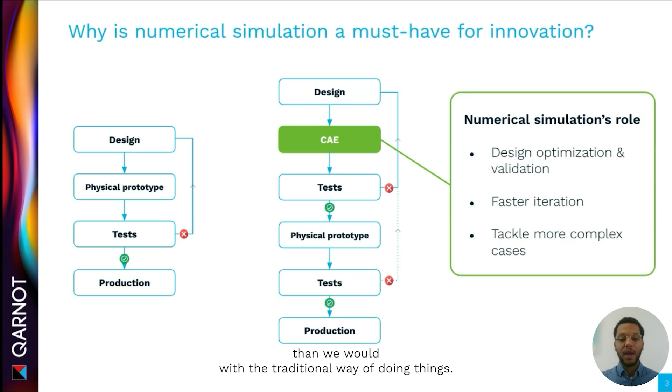But even though this allows for building products faster, there are some blockers that remain to truly be able to use numerical simulation to one's advantage. And the first one is infrastructure management, because to be able to perform numerical simulation, you would have to manage all of the layers that it takes to perform those simulations, which also means a lot of upfront costs, because to operate your own resources, you have to be on the CapEx side of expenditure.

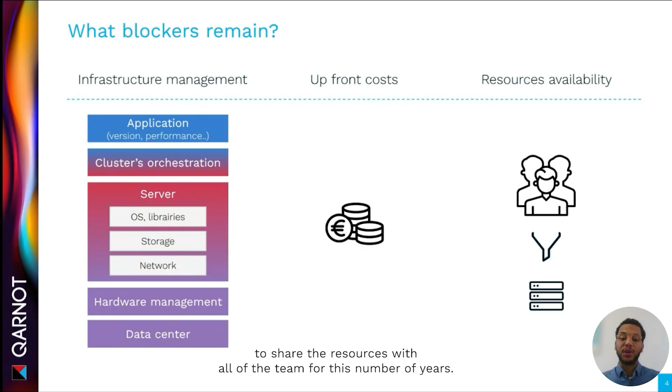And then once you come all this way, you have to be able to make the resources available for your engineering team, which can be a challenge, especially when you've built your resources for a number of years. Then you have to be able to share the resources with all of the team for this number of years. And those barriers bring consequences. There are missed opportunities for innovation.

The real means of innovation becomes the resources that each company has, and this is something that we want to break down, because the opportunity to bring innovation with new products should not be limited by resources. And so the missed opportunities, the reduced ambition, and the competitive gap should be overcome by having access to HPC and numerical simulation, no matter the resources that you have.

And this is what Qarnot aims to do, to lift the existing barriers. Our mission and our objective is to bring the HPC infrastructure that is required to perform numerical simulation, to make it as accessible as possible for all CAE engineers. So our mission and our vision is to take on the IT, so you can focus on your expertise, which is the actual physical analysis of your cases.

So this is where Qarnot comes into play, and I will now give the floor to Maxime to explain how Simvia takes its part in this democratization objective.

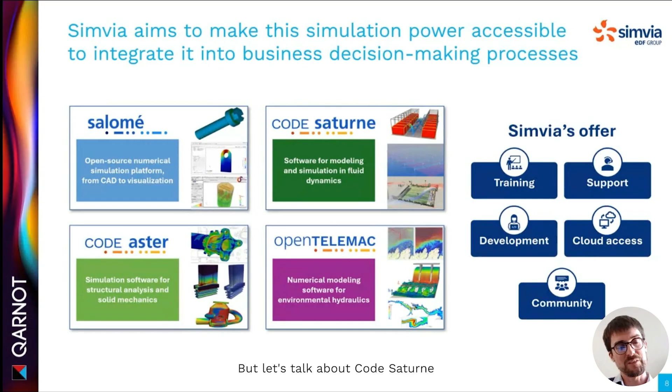But let's talk about Code Saturne. So as I said, it's a CFD solver. You can see on the right that there is a graphical interface where, based on the mesh that you have made with Salome, you can define the boundary conditions that you want. You can use some turbulence models, RANS or LES. You also have access to specific modules because it's developed by EDF. You have some applications related to combustion, atmospheric simulation, particle transport, electric arc, and so on. So it's quite a huge variety of models that you will have, and you also have some multi-phase features, free surface flow and volume of fluids.

But because it's developed by EDF, you don't need to think that it's only applicable to EDF applications. You can also run some airflow dynamics, some turbomachinery, manufacturing processes. You have several types of real-world applications that we see every day in the literature.

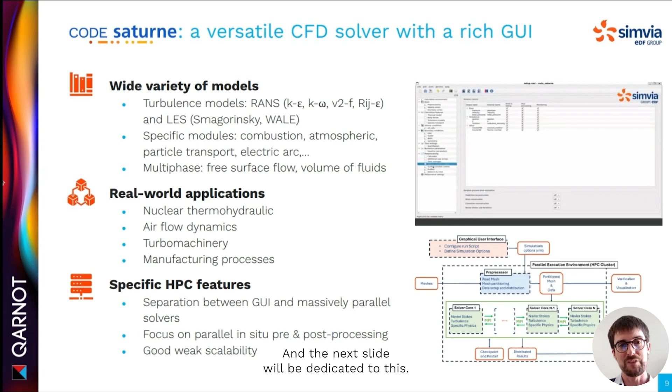And the third part of this slide is dedicated to HPC because the idea of the software is really to be HPC compliant. It runs on massive models, usually at EDF. So the idea was to have a strong separation between the graphical interface and the massively parallel solvers. So that's done with Code Saturne, and also a focus on parallel in situ pre and post processing, which is quite important. And I think François will agree on this part. We also have great work on the scalability, and the next slide will be dedicated to this, but that's a showcase of what can be done with Code Saturne.

So here the idea for the webinar was to have an illustrative use case. So it's a simplified geometry of a blade in a rotor engine.

So we took the geometry from GrabCAD, which is an open source library with geometry. We clean this with Salome. We have done the meshing also, and we run a k-omega SST turbulence model in order to have the behavior of this system. And we want to have the temperature and the pressure at the surface of the blade. So it's a simplified version of what can be done in the industry, but it's quite interesting.

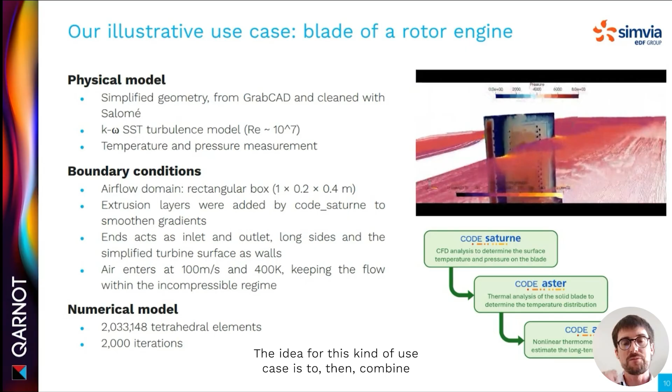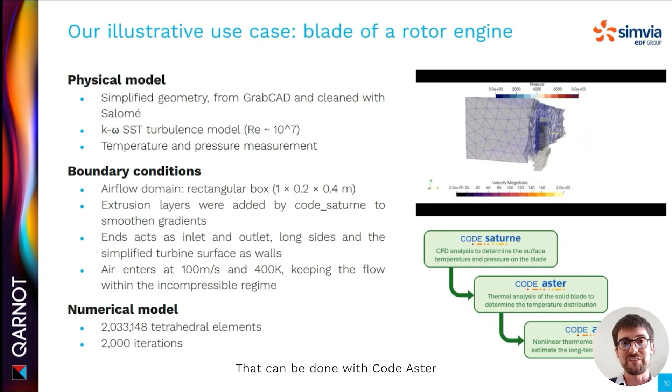So here we have the air that enters at 100 meters per second and 400 Kelvin, and we need to have access to the results at the surface of the blade. The idea for this kind of use case is to then combine the CFD analysis with a thermal analysis of the solid that can be done with Code_Aster in order to have the distribution of the temperature inside the blade. And then you can run your nonlinear thermomechanical analysis if you want to estimate what will be the long-term structural integrity of your system.

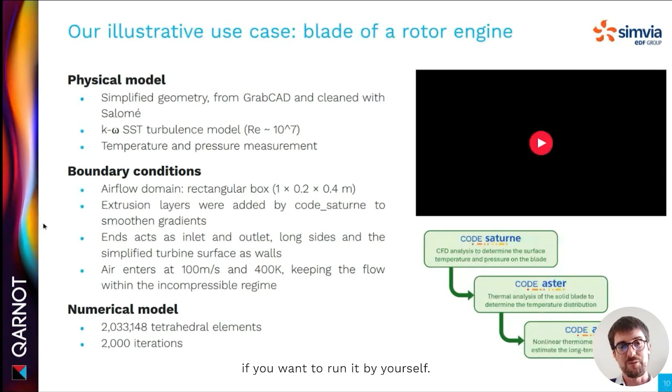So for the matter of the benchmark, we launched this on a little bit more than 2 million tetrahedral elements and 2,000 iterations. And you will have access in the future to this model if you want to run it by yourself. So for this benchmark, we worked with Qarnot. We ran it on Intel Xeon processors. The idea was to enable MPI parallelization, and we tested this with a sequential execution and up to 28 cores execution.

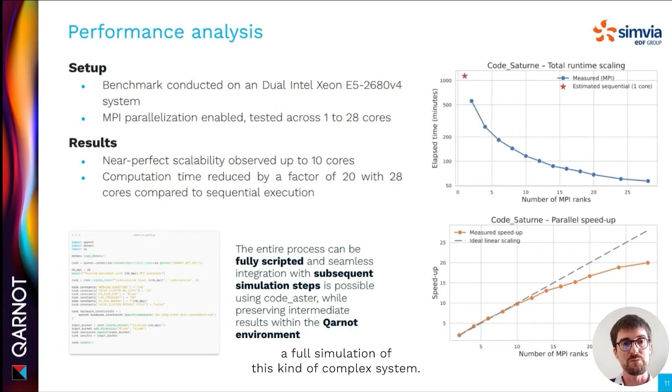The last thing that I wanted to say is that something really interesting when you use the HPC world is to have the entire process in the same environment. And that's something that you can do with Qarnot because you can script every task that you need to do. You can keep your intermediate results in the Qarnot environment. And if you want to run a Code_Saturne simulation and after this a Code_Aster simulation, you can stay in the same environment. And it's quite interesting when you want to do a full simulation of this kind of complex system. But now Théo will showcase how to run Code_Saturne on Qarnot.

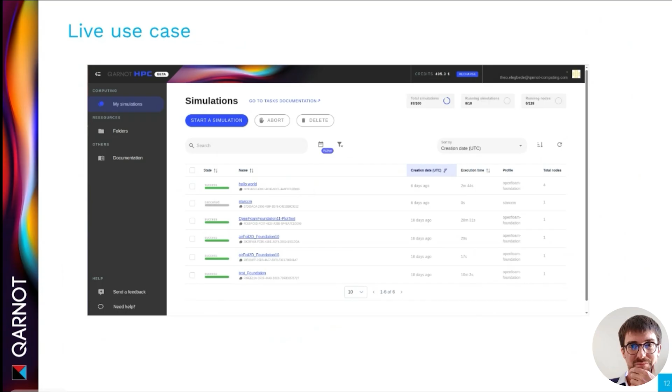Exactly. Thank you, Maxime. So what I suggest is that we move on to the actual platform to show how we can launch this very case on Qarnot's infrastructure. So here on my screen, we have the access to the platform that allows us to launch simulations directly onto Qarnot's infrastructures and hardware. So how to launch the motor blade case that Maxime just detailed? We can go on start a simulation, and the idea here is to have an interface that is as simple as possible for every engineer CAE user.

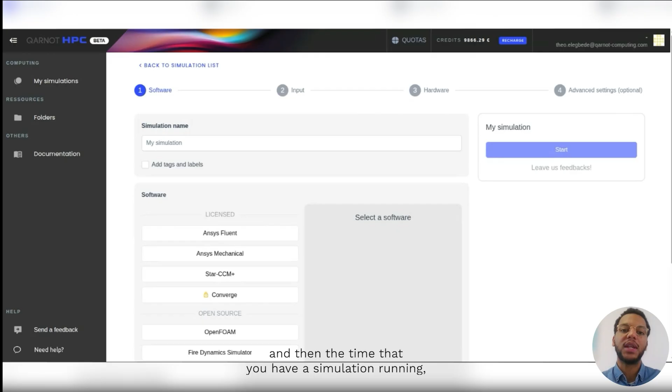So the idea is that you don't have to put a lot of effort to understand how the case will be launched on your clusters; what will be the interconnect between the nodes and things like that must remain on the IT part. What we want is that from the first time you log in to the time that you have a simulation running, this time is as short as possible. And so this is something that I will try to show you. First, we can choose the name of the simulation. So here we will have a motor blade case run on Code_Saturne.

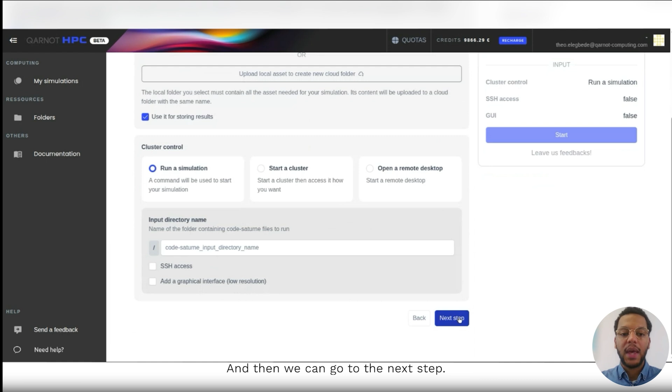And then what we can do is just choose Code_Saturne from the catalog to choose the software environment that will be solving our case. We choose the latest version of Code_Saturne, which is already integrated into Qarnot's environment. And then we can go to the next step. So far we've chosen the software environment. Now we are going to pick the actual files that we want to bring as inputs to our simulation.

So as you can see here, I have access to several directories that I can also find here with the Explorer. And those directories contain all of the files that I need to run some simulation. So here I will just go for the Code_Saturne directory that I've already uploaded, and that contains the actual working directory with all of the inputs, so the motor blade case that we've just talked about.

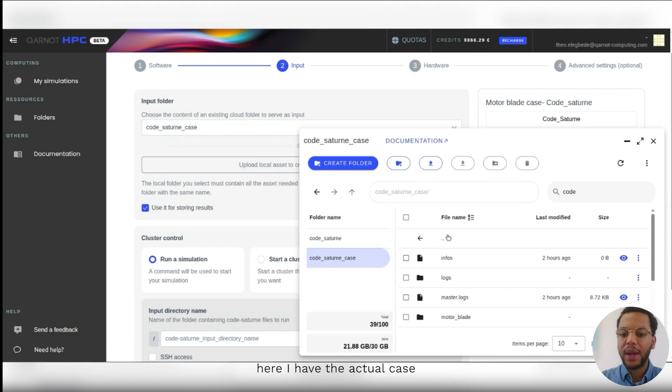So now what I will do is launch a batch simulation. I can specify the actual working directory within the directory I've just chosen. So the Code Saturne directory, if I show you its content, here I have the actual case, the motor blade case, that I can run. This is the name that I will pass on to the servers so they know what is the working directory.

So far we've chosen the software environment, we've chosen how to deal with the data, what data we are going to bring to our simulation. And now the last mandatory step is to choose the hardware and the way we want to consume Qarnot's infrastructure.

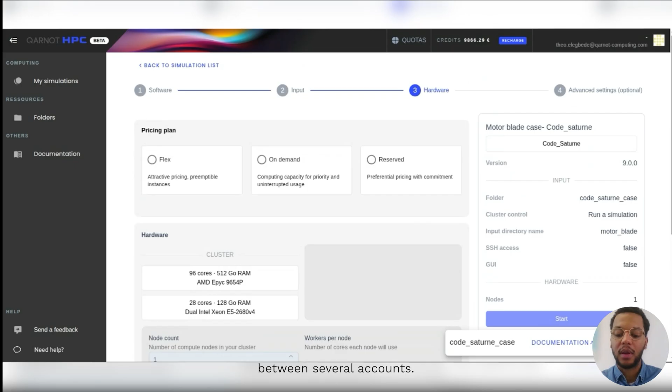As you can see here, we have the pricing plan, which consists of 3 options. The first 2 are options that will consume the credits associated with my account. For large enterprise, we can share the credits between several accounts. The difference between the 2 is the priority.

On the first option, the flex option, if Qarnot encounters peak load demand, then the computation you launch may be preemptible, which is not the case with the on-demand pricing plan. This also translates to a more economical approach for the flex pricing plan compared to the on-demand one.

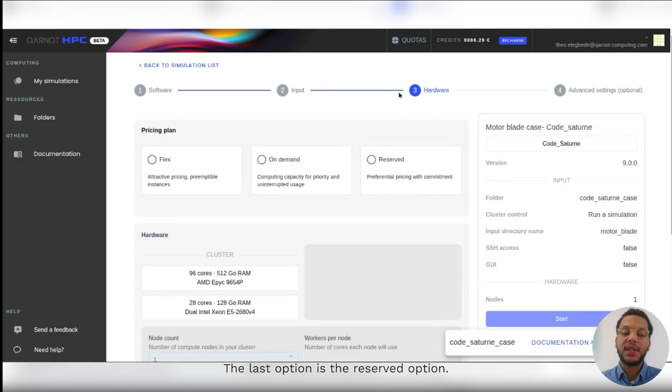The last option is the reserved option. This is the same thing as renting one of Qarnot's servers, or several servers, for a given period of time. If you know you will encounter needs for the next 6 months, you can choose to have a server dedicated to you for that period. Then you will be able to just launch simulations on those servers without having your credits depleted by the simulation time you spend on your cases.

So here for the actual example, we are going to choose the on-demand pricing plan. And then, to follow the example that Maxime just talked about, I'm going to choose the 28 cores, the dual Intel Xeon servers, to run the case.

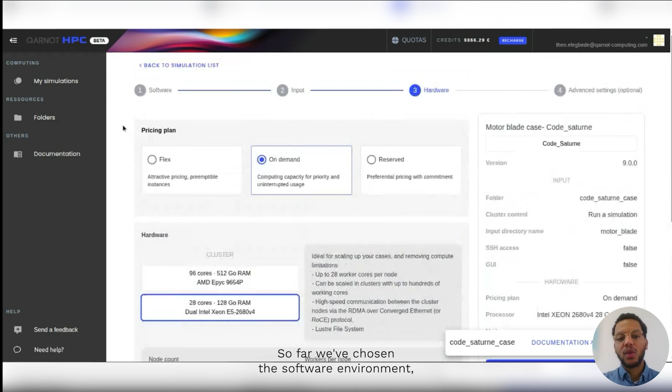So far we've chosen the software environment, the way to deal with the data for our simulation, and now we've chosen the hardware support that is going to welcome all of this case. From our point of view, here at Qarnot, we have everything we need to launch the simulation. As you can see, I can already start the simulation.

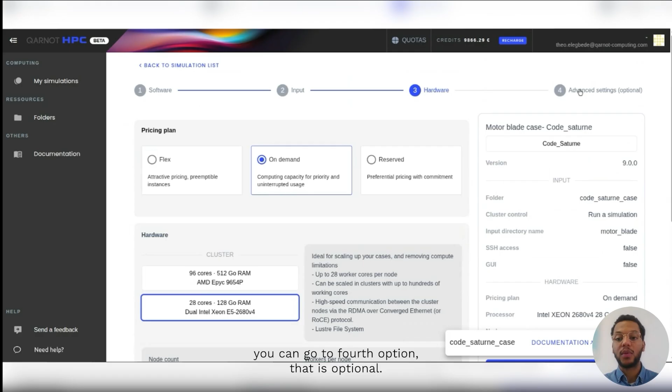But if you want to gain finer control on your simulation, you can go to a 4th, optional step: the advanced settings.

Here you will find some parameters that help you have finer control on your simulation, such as the snapshots, for example, which consist of periodical backups of the contents generated by your cluster during the run. So if you have a very long run, which may be the case for CFD applications, you will have regular backups of the content of your cluster.

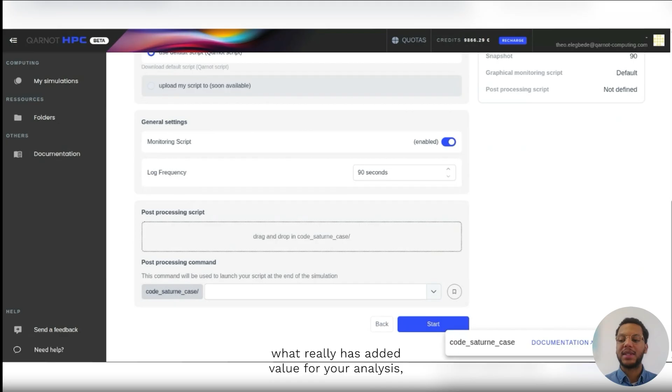You can also choose, for example, to directly add a post-processing script, so that the raw results you get are not the results you exploit directly. Straight after the simulation, you can upload, for example, a Python script that will conduct some manipulation on the raw data, so that you only retrieve what really has added value for your analysis after the simulation has run.

And then for the post-processing, François will talk more about the options that you can find on Qarnot. So this is it, we have everything we need to launch the simulation.

I can now start my case, and I will go back to the main dashboard where I can see that my case is being submitted. As you can see, I've already run it, and when I open it, I can see the details I have on the task, because as I said, the simulation may be a long one.

You need to have feedback from the cluster to know what is going on, if the simulation is converging or diverging. Do I need to let the simulation run for a few more iterations, or can I stop it now to start my post-processing actions? Those are all things you need to know during your run, and the interface allows you to do that.

As you can see here, I have all of the logs generated by Code Saturne. I can follow how well my simulation is going. If there are errors or warnings, I will find them on this particular tab, where I have all of the info that Code Saturne has generated.

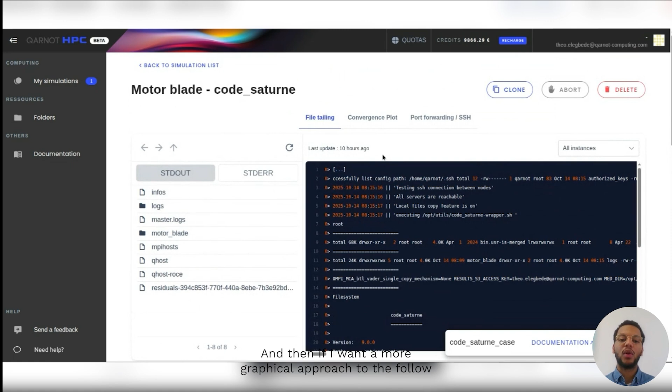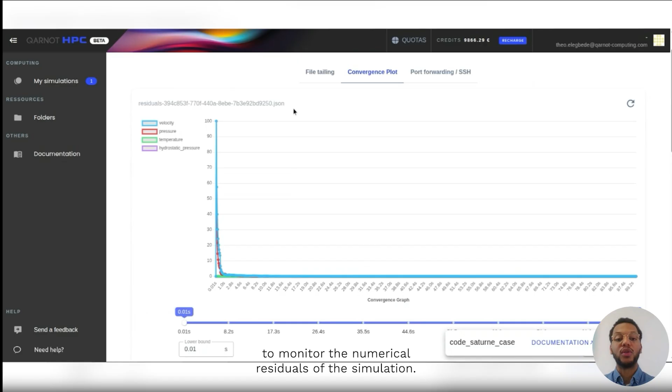And then if I want a more graphical approach to the follow-up of the simulation, I can choose to go to the convergence plot, where I will be able to monitor the numerical residual of the simulation, and I can choose to adapt the time range that I follow to be convinced that my simulation has actually converged to a given value.

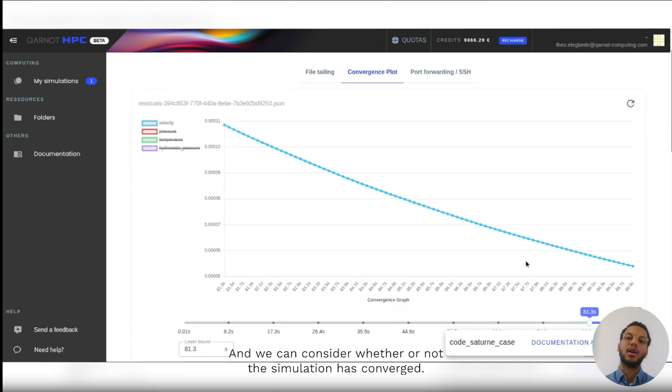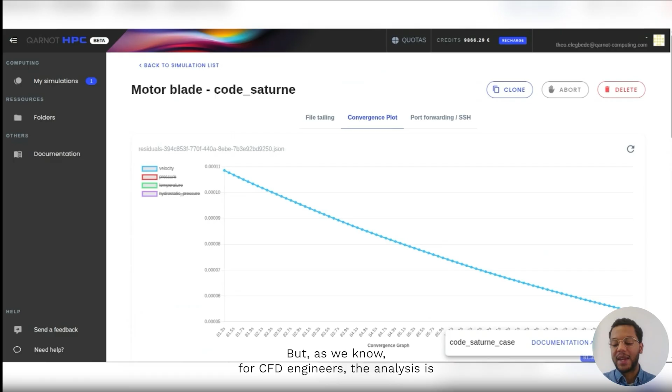So as you can see here, if I go to the last step, we can see that the residual for the velocity, for example, has dropped below some values, and we can consider whether or not the simulation has converged. So this is everything we put in place to allow you to have feedback from the simulation during the simulation. But as we know, for CFD engineers, the analysis is also a big part of the run that you will have to make. You will have to gain the physical sense of the case that you've run.

And this is where ParaView and Kitware comes into place to allow you to analyze the results that you've gained from a done simulation.

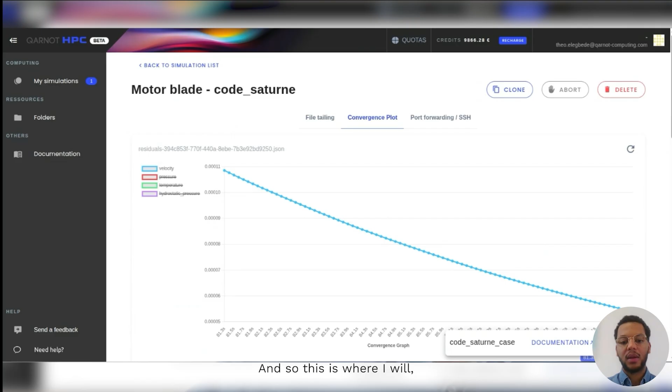And so this is where I will give the floor to François, so that you may, I'm going back to the slides, so that you may talk more about ParaView. Yes, thank you.

Perfect. Thank you, Maxime and Théo, for this nice presentation. I'm very happy, as Maxime said, to participate in this webinar. So I will introduce shortly Kitware and ParaView to you if you're not familiar with the company and the product.

So Kitware is a medium-sized company, about 200 people worldwide, with offices in the US and in France, where I'm from and where I'm located at the moment. Our focus is to develop open source software for science and for open science in general, with a strong commitment in data analysis and data visualization.

And we are really a tech-oriented company, as most of the people in the company are people with some strong graduate degrees. For instance, I'm a mechanical engineer and software developer, even if nowadays I'm the director of the ParaView team in Europe. So in the next slide, we will see some of the products we develop or we co-develop.

Actually, we have more than 40 products that we support at Kitware. And usually we call them more than products - we call them usually platforms, because as they are open source, you have access to the source code. You can modify it, change it,

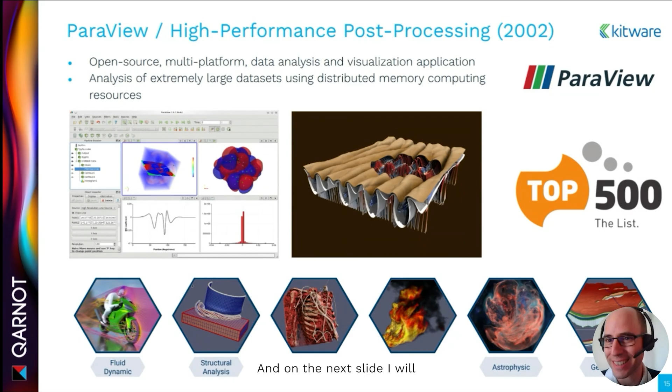On the next slide, I will close the ParaView presentation. So ParaView has a client-server architecture.

This architecture allows ParaView to open very large datasets, massive datasets on a cluster, and to have remote rendering. Thanks to this architecture, we have a big ecosystem around ParaView. We have the desktop client that I will showcase in a minute.

We also have lots of bridges like web visualization, where we can connect a browser to visualize data. We have lots of connections with the Python ecosystem, which means you can do anything in batch mode, similar to what you can do with the Qarnot infrastructure and Symvia. With Python comes a big ecosystem.

You can also do machine learning with PyTorch, TensorFlow, also ONNX for surrogate modeling, for instance. We also have more advanced visualization like virtual reality and augmented reality with OpenXR, Jupyter Notebook, and also in-situ analysis with ParaView Catalyst. So we have a big ecosystem around ParaView as soon as your data could live in the ParaView server.

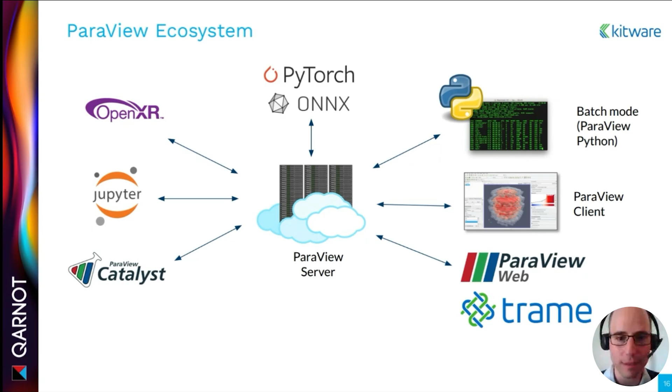Okay, so I will move to the demo time. I think I will share my screen right now. Can you see it? Yeah, perfect.

So I just opened a graphical session on the Qarnot infrastructure. This is VNC with the web client, so it runs in my browser, in Chrome. I just created the standard visualization session, and we can see we have some nice hardware available: 64 cores, 126 gigabytes of memory, and two NVIDIA RTX graphics cards, A6000, with 49 gigabytes of graphic memory available.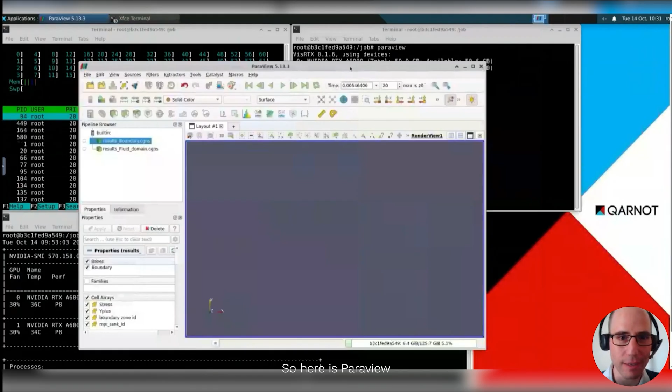So this is quite interesting hardware to use for post-processing. Here, this is ParaView provided by Qarnot. I open in the software the simulation results from Code Saturne that Maxime just showcased, which we ran on the Qarnot infrastructure.

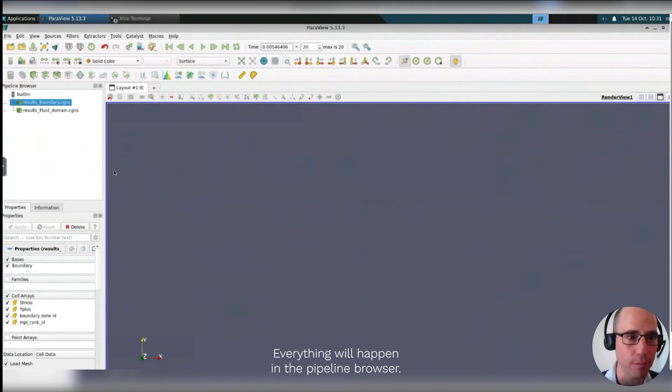So if you don't know ParaView, a quick training: everything will happen in the pipeline browser. This is the first thing to understand. In the pipeline browser, this is where you open your data and modify it in order to extract things and to visualize.

So here I just opened the CGNS file from the Code Saturne simulation. To display something in the 3D screen in the middle here, we just click on the eye close to the name of the file we just opened. And here we have a first data which is displayed, a big box output of the simulation, the boundary.

The second thing to know when you use ParaView, besides the pipeline browser, is that you have two other interesting combo boxes. The first one is to manage how you want to represent your data - this is the representation.

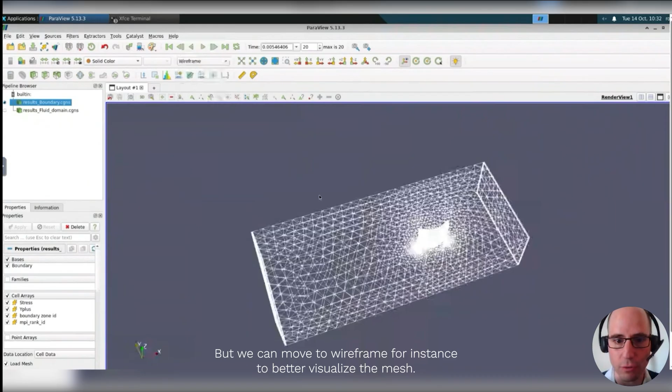By default this is a surface, but we can move to wireframe, for instance, to better visualize the mesh. We can also superpose the mesh with the surface, or move to point representation, point Gaussian, and so on. So this is the first thing to know about ParaView.

The second one is - usually with some data you have some fields on the data, so some pressure, temperature, stress and so on. You can use the second combo box to choose the one you want to display. Here we have, for instance, some stress data on the mesh. So let's display it - now it's colored based on some color map.

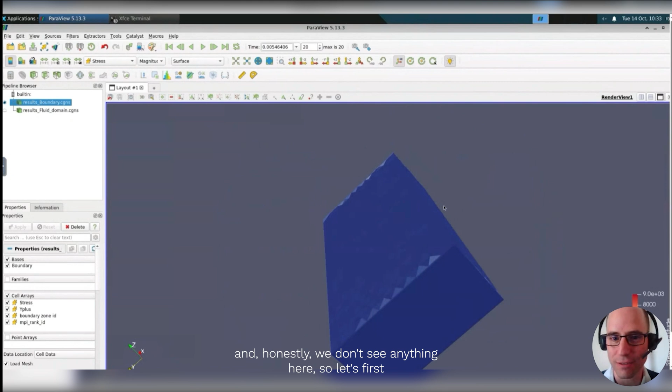First thing, here we are looking at a box, and honestly we don't see anything here. So let's first try to reduce the volume of interest to see what's inside. I will move to, for instance, feature edges here, to display just the features.

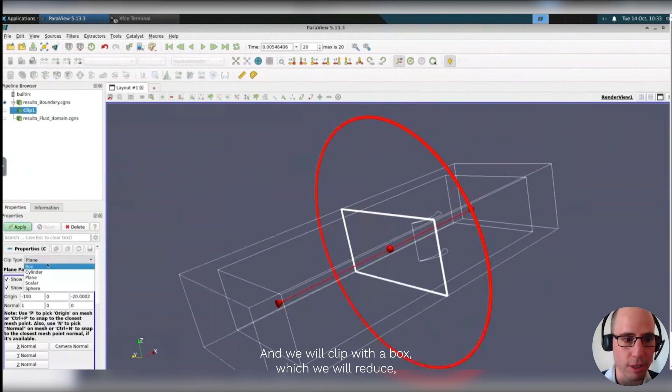So first we will apply filters on the data in order to extract better information, which is a clip. We will clip with a box, reducing the volume to some specific box. We can select interactively the volume of the box we want to clip. For instance, just something like that - let's choose this.

Let's click apply. Oh, sorry, I moved the box - okay, let's do it again. Select the box, okay, reduce the volume we are looking at the moment, and on the top here.

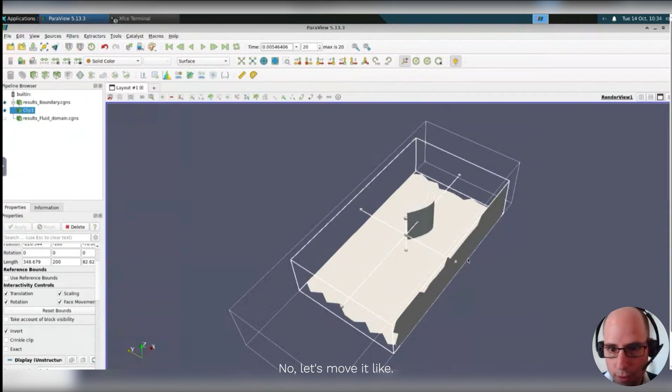Okay, should be better, let's apply it. Let's keep with exact - oh, I have a gap here, so let's reduce on this one. No, let's move it like here. Okay, should be perfect - and click exact to get the exact volume.

Okay, so now we have extracted the meaningful information in our dataset. But what about displaying something like the stress, for example? The stress, so it's colored with a nice color map.

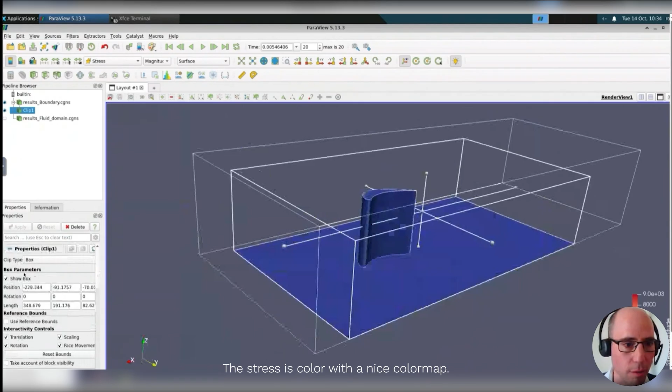Let's hide the box. You can see in the pipeline browser that we have two items here, so you are looking at two data at the same time. The initial data has some feature edges we can move. For instance, I move to surface, so I don't see anything, or just outline to see the volume.

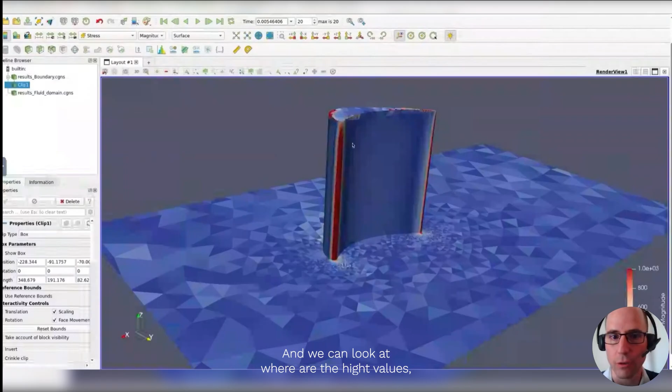And we have the clip result here. Let's hide the first one and look at this data. We have some color map here. It's maybe hidden by the resolution, but the range is not nice, so let's change the range to something more interesting, between 0 and 1000. Now we can easily see where the high values above 1000 are, and where the low values on the dataset are.

But the mapping between the value and the color could also be managed by the color map editor. It's very easy to change the color map you want, if you prefer some rainbow color map, for instance, which is very popular in mechanical imaging.

So there are several ways. I will just wait for it to reload. You can use the color map in order to change the way you see the data.

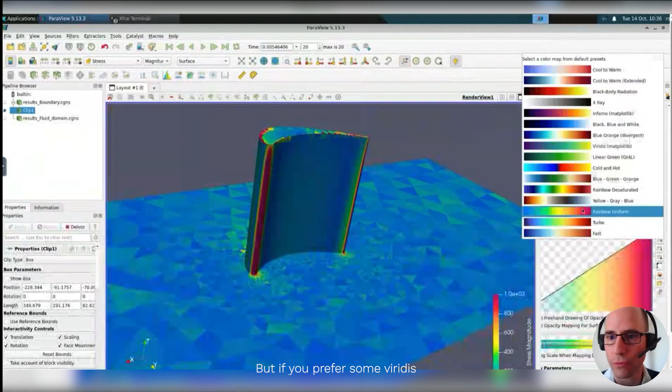So I moved to the rainbow, for instance, but if you prefer some Viridis or some Matplotlib color maps and so on, you have lots available. So let's go back to the cool one. This is a way to just understand and narrow the data.

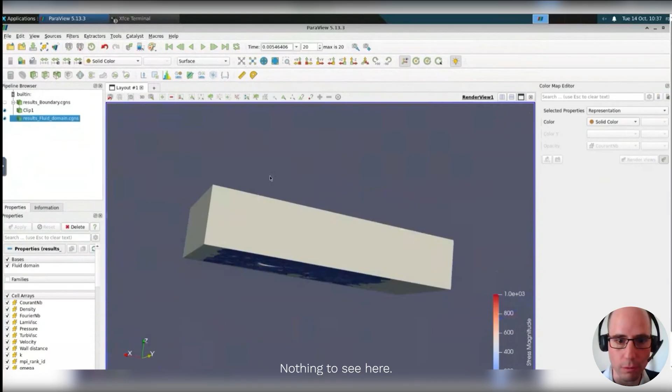Now let's look at the fluid domain, which is the second data we have here. If I display it, again we have a big box, so nothing to see here. Let's display it with some outline just to check that everything is okay.

The first process we usually do with CFD data is to use a slice. So let's create another filter, which is a slice filter, and apply it on the fluid domain. Let's select a plane, we can do Z normal for instance, and click apply. So here my slice is computed.

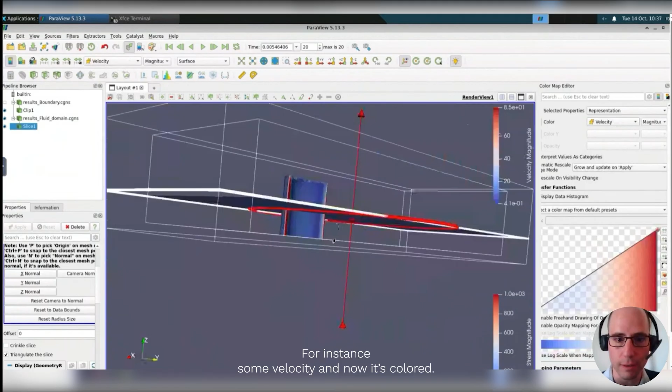This is just a plane in a box, nothing fancy to see here. Click automatic apply, and if I move the slice, everything is computed. Let's now select some result on it, for instance velocity, and now it's colored thanks to the velocity. If I move the plane again, everything is computed.

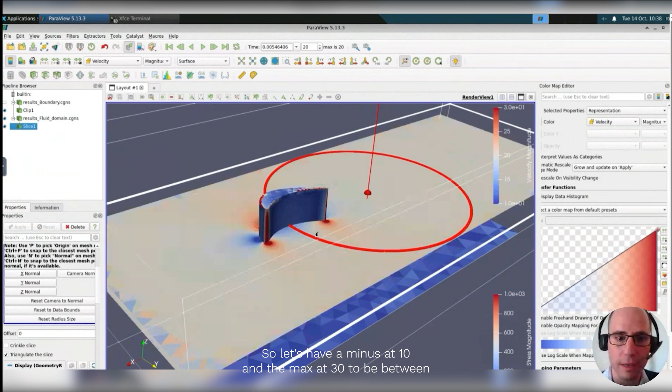But as we can see, the color map range is not great here, so let's change the range. The average velocity is 20 in this simulation, so let's set the min at 10 and the max at 30 to be between. Now we can easily see where the high velocity and low velocity are around the blade very easily.

And of course, if we move the slice interactively, we can see that everything is computed automatically. I will just change the custom range again, and disable the automatic rescaling to keep the value. So slice is another very popular way to explore CFD data. I can now hide the slice.

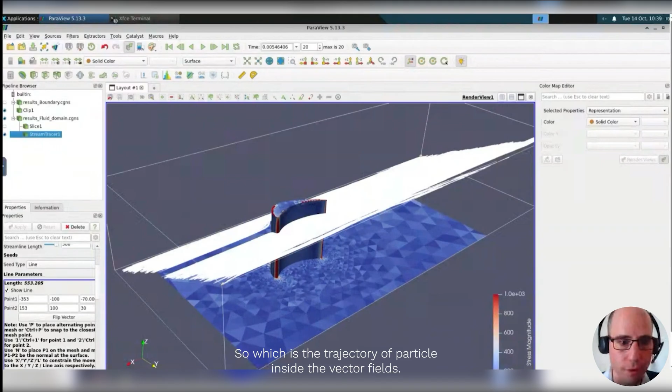And the last one I want to showcase before the end of this quick introduction to ParaView is the stream tracer. Usually, as we have a vector field, for instance the velocity, the classic way is to use streamlines, which show the trajectory of a particle inside the vector field. By default it chooses a line, which is great.

Let's change it to fewer lines, and I will move the lines to something more meaningful, up in front of the blade with the Y direction.

So you can see in a few clicks I am able to play a bit with the slice and change it, just forward should be enough. If I move the end of the line, everything is computed automatically, and you can understand where the flow is moving and so on.

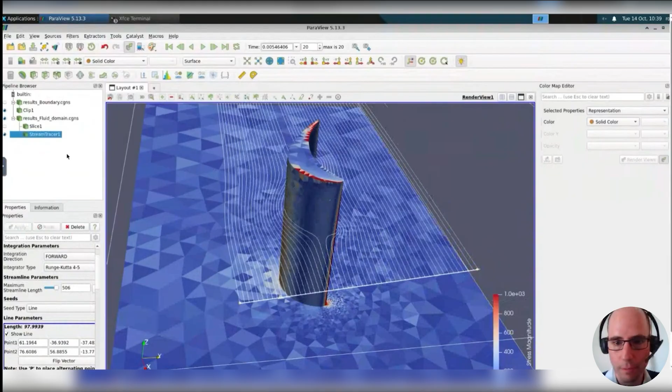The streamlines are by default some lines, so sometimes it's more interesting to have thicker lines, and we can use a tube filter to make them more interesting here.

Once again, my network is failing, I'm sorry.

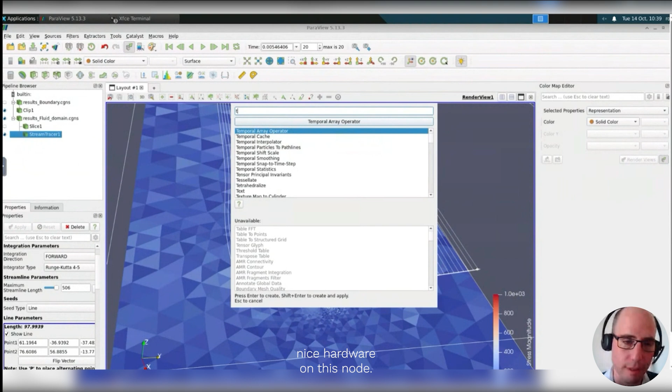And as we also have some nice hardware on this node, we can also use some advanced rendering, like physically based rendering, to put some materials on the data and do realistic renderings, including ray tracing algorithms, which means we move to a more advanced way to represent the data.

About ray tracing, we have two libraries available by default in ParaView. You have the Ospray library, which does ray tracing on CPU.

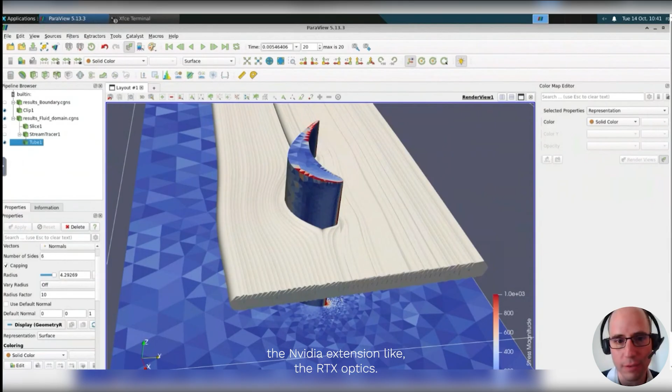So if you have a cluster when you don't have GPUs, here we have powerful GPUs, but you can use it. And if you have some GPU, you can use also the NVIDIA extensions like RTX or OptiX. So here I just applied some tubes. Let's change the size of the tubes to something close, and here it's really nicer to see. And of course, again, I can move the stream tracer and see the tubes updated in real time if I want to.

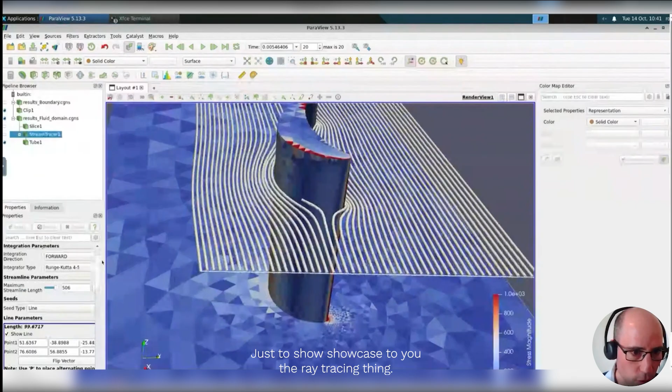So just to showcase to you the ray tracing things, if I enable here, we can move to, for instance, the path tracer and have some nice advanced rendering. Okay. So first, it's a bit blurry, and if we set a nice sample per pixel, we have some nice shadows computing on the floor while you are doing your post-processing.

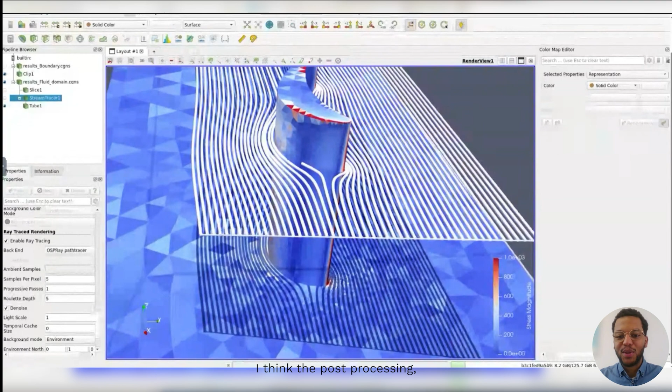I think the post-processing is always one of the most satisfying parts of the whole CFD workflow, because it's like the end of a whole case that has run on your infrastructures. So thank you. As you can see, we've shown how you can run a whole case from the pre-processing to the post-processing on resources that are made available to everyone. This is the main objective that we pursue.

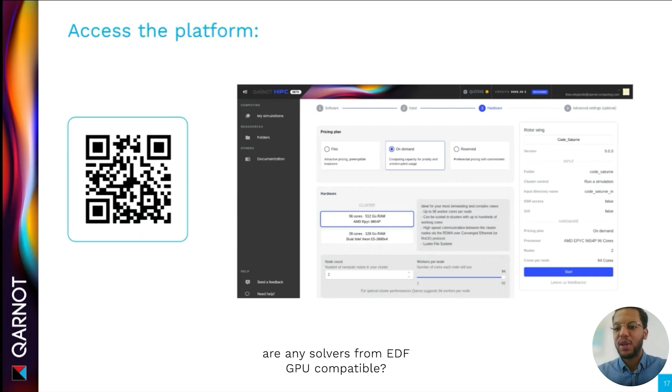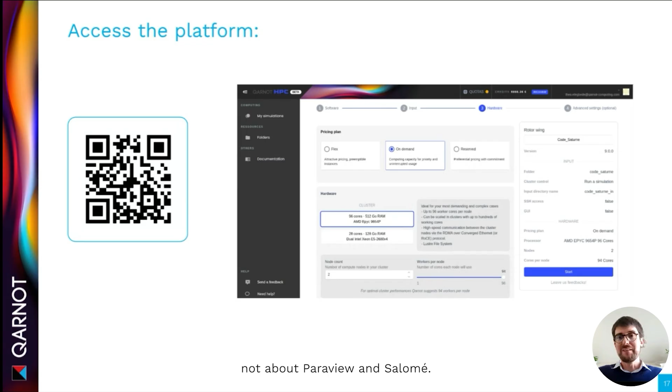Are any solvers from EDF GPU compatible? Yeah, it's a very, very good question. So I believe that here we are talking about solvers, so not about ParaView and Salome. So yeah, there is some ongoing process working on Code_Saturne for GPU. The EDF developing team is seeing some speed up, and in the near future they will have a version of Code_Saturne on GPU. Will it be open source or not? I can't say for the moment, but it's an ongoing process and really interesting.

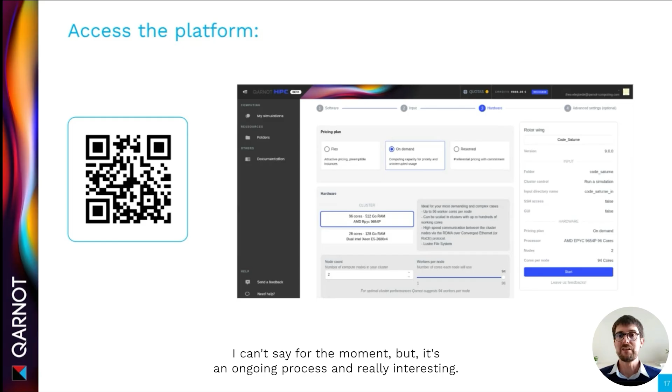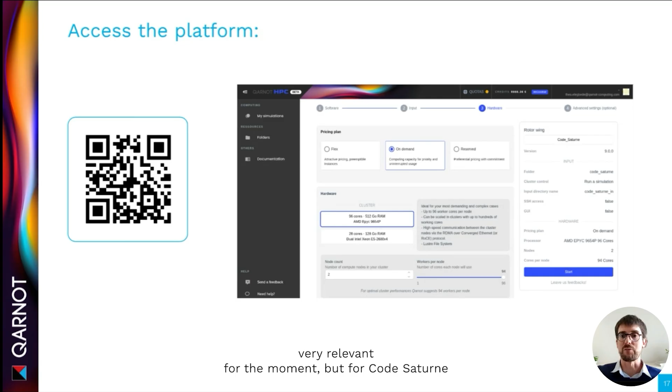It's not the case for GPU, let's say for structural solver analysis. It's not something that is very relevant for the moment, but for Code_Saturne, in the near future, you will have a version based on GPU infrastructure. Yeah. Thank you.

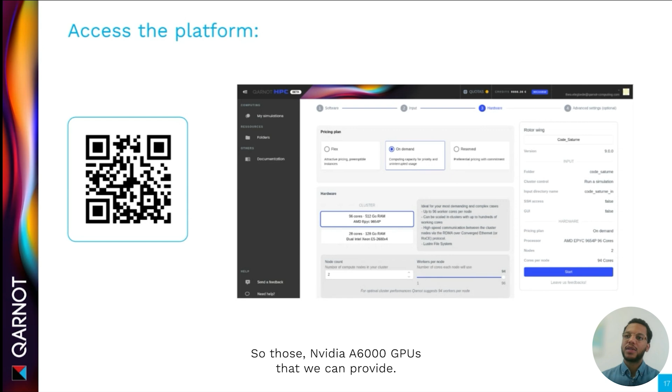There's another question regarding both Simvia and Qarnot this time. Is Code_Aster available or will it be available with Qarnot? So yes, there are integrations underway so that Code_Aster will soon be available on the platform, just as Code_Saturne is currently. Does Qarnot's platform have GPU hardware? Yes. So the presentation that you just saw on ParaView was made using our GPU hardware. Those are NVIDIA A6000 GPUs that we can provide.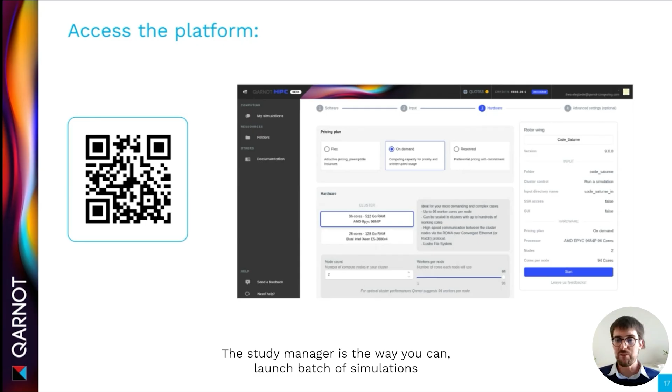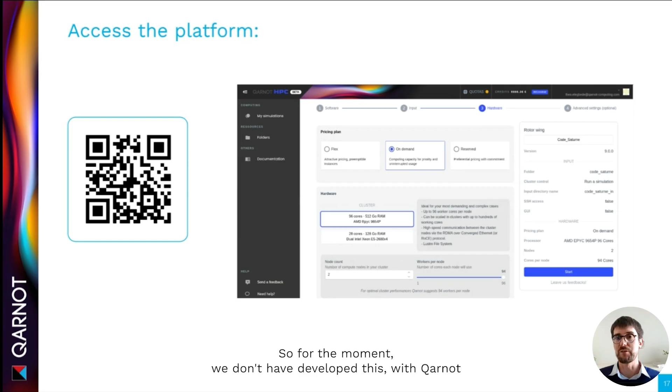Does Qarnot infrastructure support the study manager feature for Code_Saturne? So the study manager is the way you can launch a batch of simulations, and you can have access to a comparison with, let's say, some probes that you have inside the simulation. It's something that can be done and is done by EDF on clusters. For the moment, we haven't developed this with Qarnot, but it's really related to the time that we dedicated to it, there is no block to do so. So if you are interested, it's good to know, and we can work on this with Théo. Yeah.

And as you mentioned also, to have a batch of simulations, everything I've shown you on the launch of a simulation, you can also do with Qarnot's SDK, so Python, or directly the API or the command line interface, to launch simulations and have a more bulk approach to the campaign that you may have on your cases.

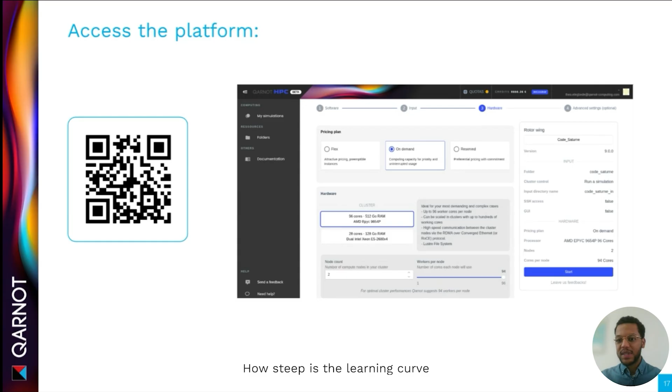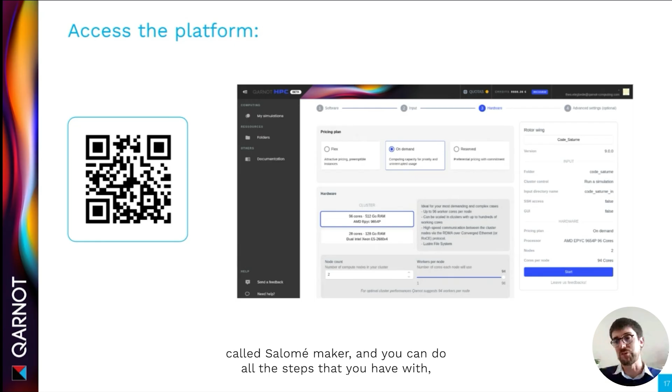One question for Maxime: how steep is the learning curve for moving from a commercial CAE software package, ANSYS or Abaqus, for example, to Code_Aster? Yeah, it's a very relevant question. So it depends on which application you have of ANSYS. Is it the Workbench that you use or not? You have the graphical interface that you can use with Salome and Code_Aster. It's called Salome-Meca, and you can do all the steps that you have with ANSYS Workbench in the same way. The only thing is to know where the buttons are.

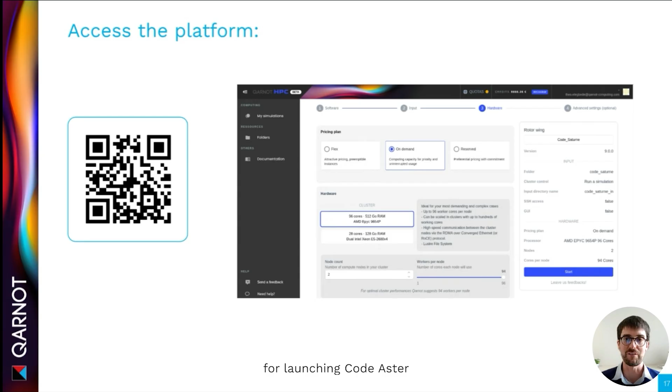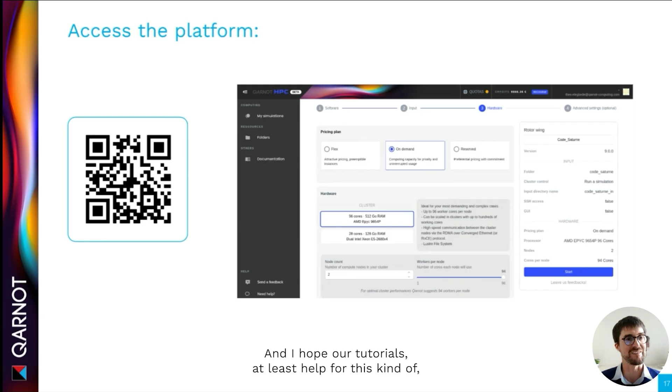And if you are more in the scripting part of simulation, it's based on Python if you want to run simulation with Code_Aster. So if you know Python, you won't be lost launching Code_Aster. I won't say that it's painless. You will need to take some time to learn this new tool, but we can help and bring some support for this. And I hope our tutorials at least help for this kind of migration between commercial CAE and open source.

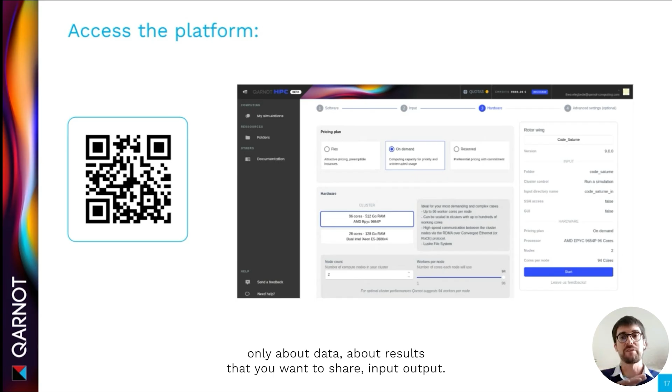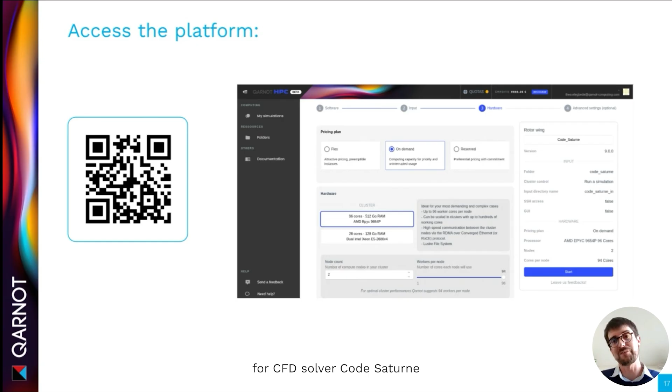Thank you. So a new question regarding the interface between Code_Saturne and Code_Aster. How have you done the data transfer from Code_Saturne to Code_Aster? What are the challenges faced? So if you talk only about data, about results that you want to share, input, output, there is a format dedicated to the software, which is called MED format, and it's made for the CFD solver, Code_Saturne, and the CAE solver, Code_Aster. So if you want to share the data, you can rely on this format to communicate between both solvers, but there are some developments in progress to make this easier.

But based on the use case that you have seen today, we will have a tutorial next week explaining how to do this, how to run Code_Saturne and then Code_Aster. So it will be on our GitHub.

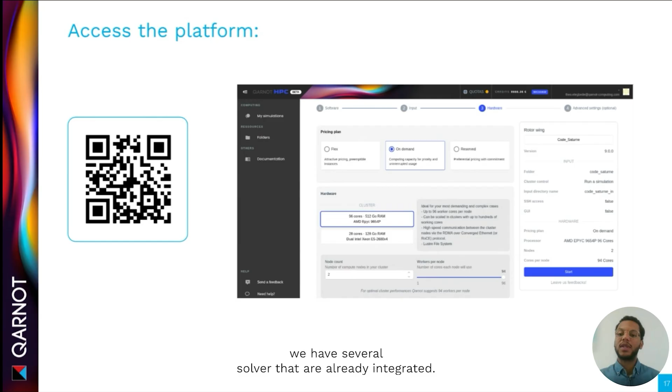What do I need to change in my code to make my local simulation work for HPC? Do I need to learn Slurm and other HPC tools? So this will be regarding the launch of your simulation. On Qarnot, we have several solvers that are already integrated, and we've done the integration part so that it can be dispatched on Qarnot's infrastructure. So you do not have to learn Slurm to launch simulations on Qarnot. This is one of the things that we take on.

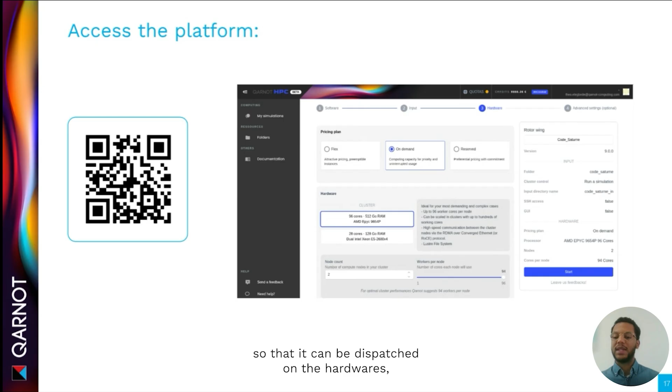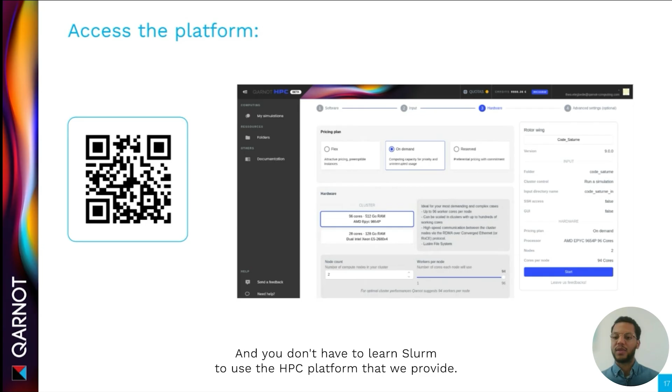We have our own in-house orchestrator, and we organize the workload so that it can be dispatched on our hardware depending on your case, depending on the hardware needs, and everything that you've required for your launch. This will be managed on our end, and you don't have to learn Slurm to use the HPC platform that we provide.

What about specific version availability on Qarnot? For instance, if we still use an old version of Code_Saturne. So this is something that we can discuss fairly easily. Once we have integrated one software, it is pretty straightforward to upload a new version, depending on particular cases, of course. You can reach out to us to organize this if you know in advance the particular version that you want to use, especially for Code_Saturne, because we have this partnership. It will be very easy to integrate the version that you require.

Does your orchestrator automatically choose the best number of CPUs? So this really depends on the case that you are about to run. This is something that you can play with. You have a way on launch to select the number of working cores that you want on each server that will be working on your case. But this is something that we do not automatically choose for you. We have broad suggestions, but usually we suggest that you try things out to see what is the best ratio for your particular case.

During our benchmarks, we've seen cases where, for example, for the Xeon servers, using 24 out of the 28 cores was the optimum, for others 26 was the optimum. This really depends on the case that you are trying to run.